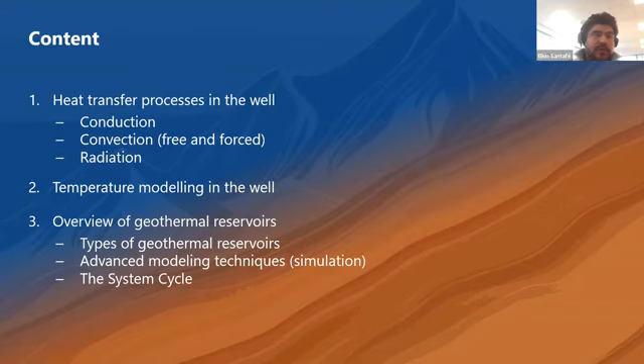So let's start with the agenda for today. We are going to cover three main topics. We are going to review the heat transfer processes in the well by using a general framework and definitions. After that, we are going to cover temperature modeling in the well in terms of the modeling process. And finally, we are going to talk about an overview of geothermal reservoirs, addressing how in practice we usually implement the systems by using, for example, numerical reservoir simulation and taking into account the system cycle.

So let's start with the first topic, the heat transfer process in the well. Heat is a form of energy. Specifically, it is thermal energy that is transmitted from one body to another if they have different temperatures. As a general rule of thermodynamics, heat always flows from the body with the highest temperature to the one with the lowest temperature. This occurs until thermal equilibrium is reached, that is, both substances or objects have the same temperature.

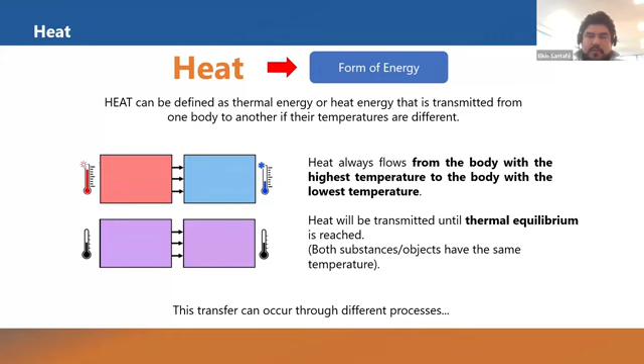This heat transfer can occur through different processes or mechanisms that we are going to review more in depth. These processes are conduction, convection, and radiation. Let's describe in general lines what each of these mechanisms is about. Conduction is the transfer of heat by direct contact between the molecules of a body or substance. The molecules impact each other, as we can see here, and in that way they transfer heat between them. This process can occur in solids, liquids, and gases.

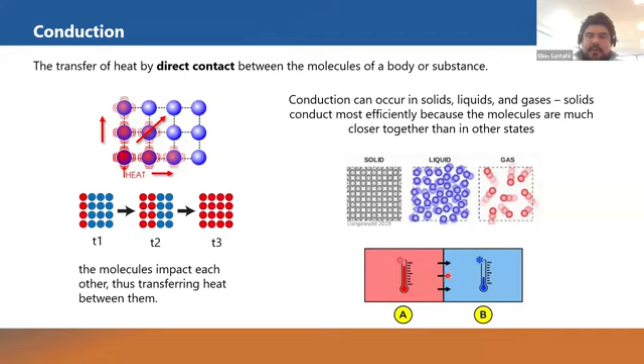The heat can be conducted within the same substance or body, but if we have two individual bodies at different temperatures that are in contact, heat conduction will also occur from the one with the highest temperature to the one with the lowest temperature. The speed at which this heat transfer occurs depends on a property known as thermal conductivity. This thermal conductivity determines the ability of a material or substance to conduct heat. Here in this table, we can see thermal conductivity values for different materials.

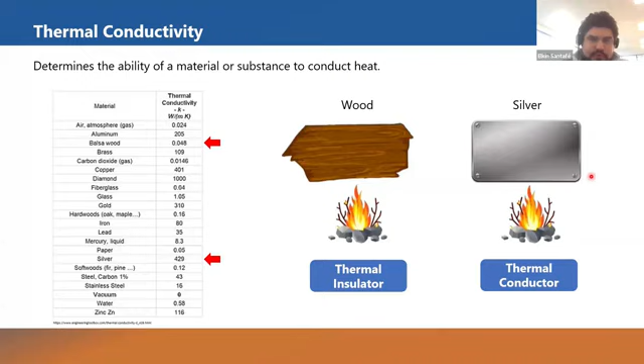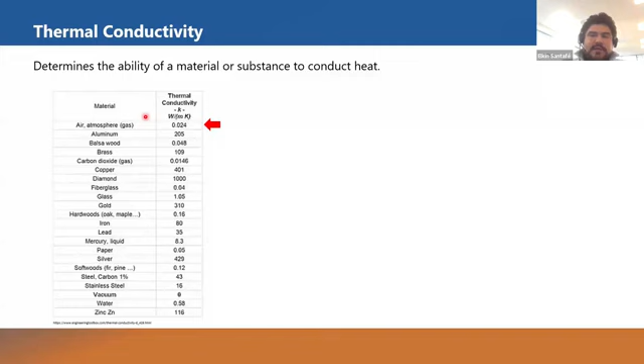In particular, we can see that wood has a relatively low thermal conductivity. On the other hand, silver has a high thermal conductivity. This implies that if we expose the same amount of wood and silver to the same heat source, wood will conduct heat more slowly, so we say it is a thermal insulator, while silver will do so much more quickly, which is why we say it is a good thermal conductor. Continuing with the table, we can see that air also has a low thermal conductivity.

Let's suppose that we have an oven at 200 degrees Celsius. Both the grill and the air inside the oven are at 200 degrees Celsius. However, if we put a hand into the oven without touching the grill, we will feel that the air is hot, but it doesn't burn us, even though it is 200 degrees Celsius. This is because air is a poor conductor of heat, so the heat doesn't pass so easily to our hand, and we do not burn ourselves immediately.

Now, in the same case, if we try to touch the grill, which is at the same 200 degrees Celsius, we will burn ourselves since metal is a good conductor, so the heat will be conducted more quickly. That is the idea behind this example, and it is a typical situation from life showing how thermal conductivity works depending on the situation and material.

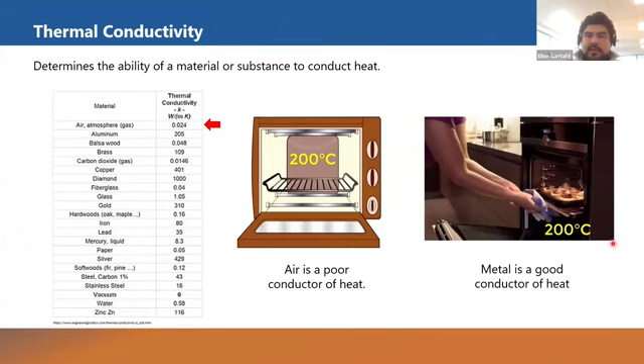What we can say in addition is that it has been experimentally demonstrated that the rate of heat conduction in a plate, for example, this plate, depends on the difference of temperature between each side and the exposed area, but is inversely proportional to the thickness of that same plate.

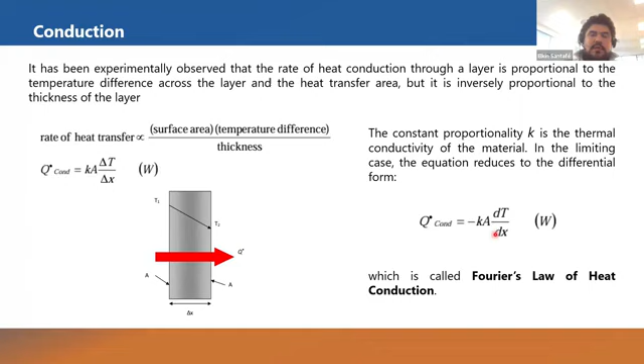So we can express this relationship in terms of deltas, as we can see here, and then take those deltas to the limit to convert them into continuous differentials. In that way, we can write the same expression that we have here in terms of a simple differential equation. And this equation is what we know as Fourier's law.

So moving now to another heat transfer mechanism, we are going to talk about convection. Convection is the transfer of heat by the movement of mass. That is, it occurs in fluids, and this implies that we will only find it in liquids and gases, right? We can divide convection, because it's a complex mechanism, into two mechanisms: natural convection or free convection, and forced convection.

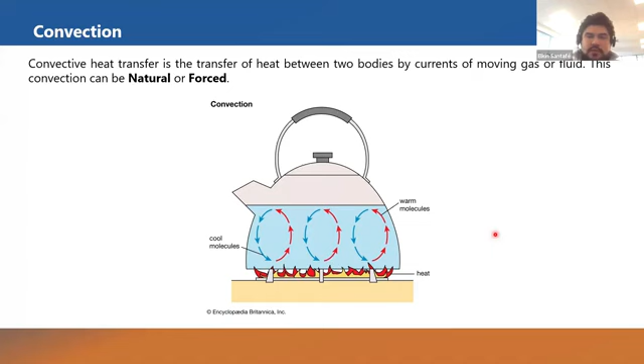Let's talk about free convection first. Free convection or natural convection occurs when the movement of the fluid is caused by density differences, which in turn are products of temperature differences, basically. For example, let's suppose that we heat a container that has a fluid inside. Let's say that we have just air inside.

What will happen here initially is that the heat is transmitted by conduction to the air that is at the bottom. And as we know, a change in temperature in a fluid generates a change in density. So in this case, the air, when heated, becomes less dense, and since it is less dense it tends to rise. So we will have a movement in this direction up, and the cold air basically will go down.

In this situation, to replace the hot air that is rising, the cool air at the top is forced to descend, and we know all of this mechanism as free convection.

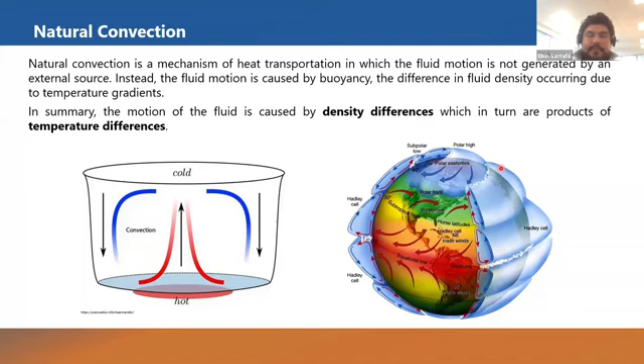Now we have forced convection. Forced convection occurs when the movement of a fluid is caused by external factors other than the local behavior of the fluid. A clear example of this is when we turn on a fan to force the flow of air over a hot surface. In this case, the air that is forced to flow over the hot surface acquires heat through conduction. But by definition, this is called convection, since we are talking about the mass movement that transfers heat from one area to another area.

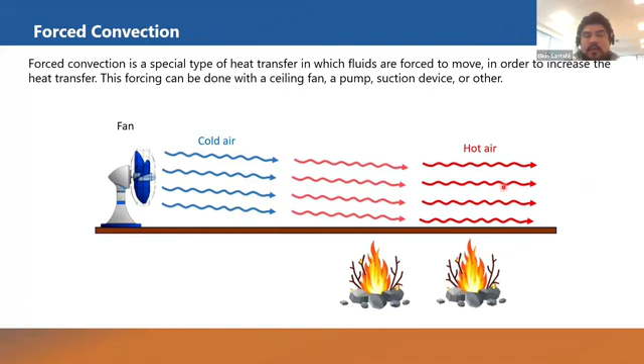So we are moving cool air in this area to air that is now hot on this part of the system. In summary, we can say that convection is a complex mechanism, as I said before. It represents the combination of two ways of transferring heat, and we can give a mathematical image through Newton's law of heating and cooling. That is the mathematical model that describes this phenomenon.

This model is composed of the rate of convection heat transfer, normally expressed in units of watts per square meter. And we say that this variable is proportional to the difference between the initial temperature of the material and the final temperature of the material through a proportionality constant that we are going to call H.

So we are going more in depth about the physical meaning of this H in a further slide. So for now, we manage it like a proportionality constant. We should also mention that the roughness and the shape of the material being heated has an impact in this process. And the value can change by doing the heating or cooling process of an object more quickly. This changes the value of H.

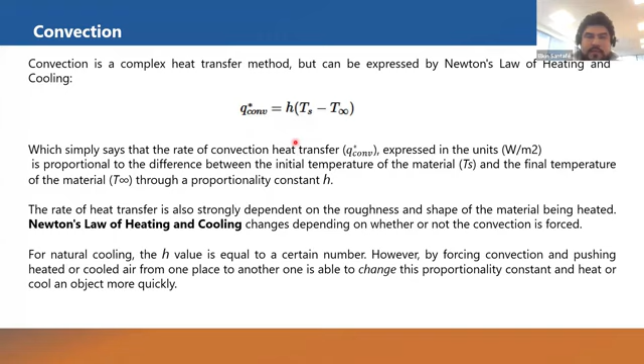So the convection heat transfer coefficient in general varies along the flow direction, right? In terms of the direction in which the fluid is moving. So in many cases, what we do is use an average convection heat transfer coefficient.

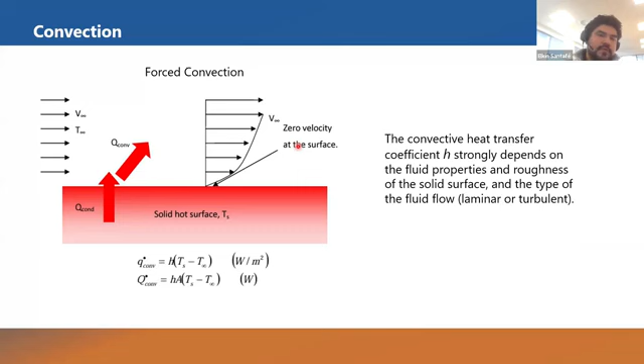Now, let's talk a little bit about the last heat transfer mechanism, radiation. We can define radiation basically as heat that is transmitted by means of electromagnetic waves. That is the concept. Some characteristics of this type of waves are that they do not require a medium to propagate, that they can even move in a vacuum, and also they travel at the speed of light since they only transport energy and not matter.

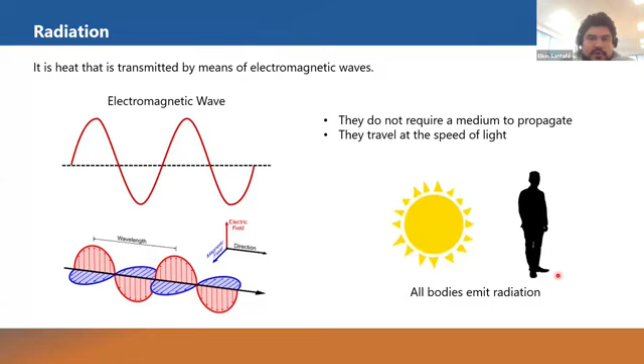But it must also be said that although it may not seem so, all bodies emit radiation, regardless of their temperature, which means that even we as human beings emit electromagnetic radiation too. So let me try to illustrate this idea better. This mechanism generally works like this: the energy carried by this wave is released when the body absorbs these waves.

For example, here we can have a campfire and a person. According to what we were saying, both the campfire and the person emit radiation, right? The difference is that the campfire, being much hotter, emits a greater amount of radiation. If a body absorbs more radiation than it emits, its temperature will increase. In this case, the person is receiving a greater amount of radiation than it is emitting, so the temperature will increase, and that is why the campfire heats the person. That is how this works, and this is a good example to explain how radiation works.

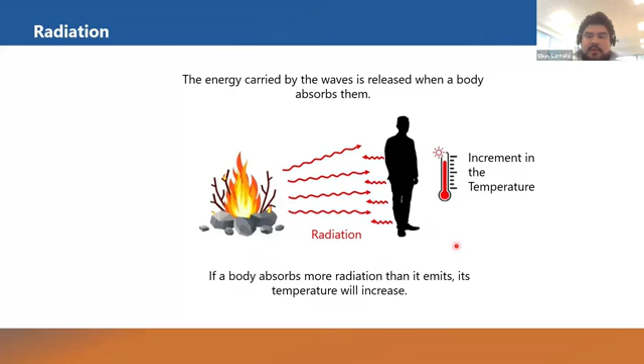So the higher the temperature of the emitting body, the greater the amount of radiation it will emit. That is the idea, since it has been shown that the amount of radiation emitted is proportional to the temperature raised to the fourth power. This is a well-established relationship for this kind of mechanism. What this means is basically that a small increment in the temperature of a body means a significant increment in the amount of radiation that the body emits.

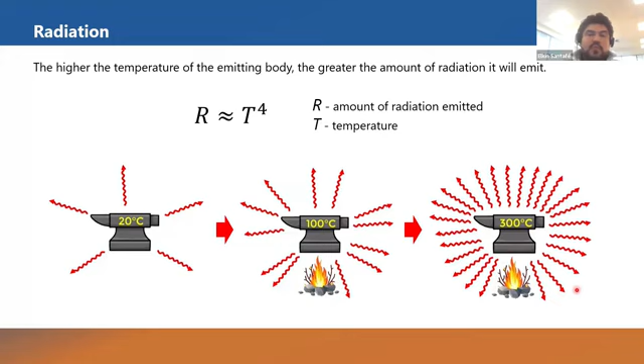For example, an anvil that is at room temperature, let's say 20 degrees Celsius, will emit a certain amount of radiation. However, if we add heat to it and increase its temperature, for example, to 100 degrees, the amount of radiation that this anvil will emit will be greater. And the same situation if we increase the temperature three times more, the amount of radiation will be greater.

Not all radiation is of the same type. That is something that we have to keep in mind, since there is a characteristic of this type of mechanism that is known as wavelength. This is basically the distance between the crests of an electromagnetic wave. And as we can deduce, it is directly related to the frequency of the wave.

What we are saying with this is that if we have a shorter wavelength, we will have a higher frequency, while if we have a longer wavelength, we will have a lower frequency. And all of this is important since the wavelength is also related to the temperature of the object that emits this radiation.

So in other words, the wavelength of the radiation emitted by an object depends on its temperature. There is a relation between these two elements. So the higher the temperature of the body, the shorter the wavelength of the radiation it emits. So this principle is used by current telescopes to observe the stars and the deep space.

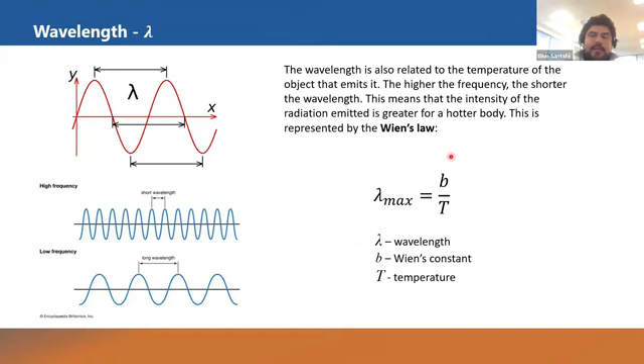And this physics is determined by Wien's law, that is expressed by this relationship here. So if we compare, following the previous example, the sun, which has an average temperature of about 6,000 degrees Kelvin, with air, which has an average temperature of 288 degrees Kelvin, we will see that the sun emits a radiation with a shorter wavelength than the air can emit, basically.

And it must also be said that the amount of energy transported also depends on the wavelength, since the shorter the wavelength, the greater the energy transported, and vice versa. So according to this, the sun emits more energetic radiation than the air can emit, because the sun has a shorter wavelength.

So with this, we can see the difference between the types of radiation, which we can analyze more easily by observing the electromagnetic spectrum, since depending on their wavelength, they can be classified in different groups.

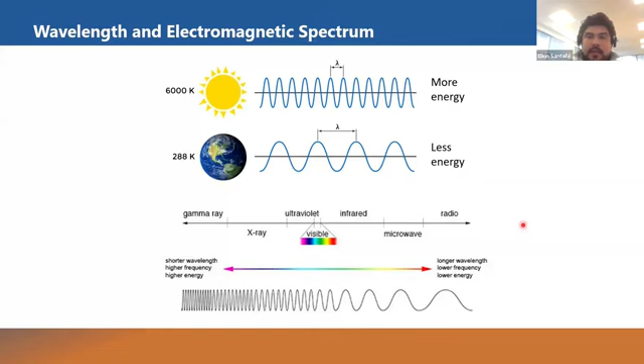We have different groups of waves. There is a dependence on the wavelength, and they are associated with the different types of radiation. But this is the mechanism that we have behind. So let's get down to business.

So all the theoretical framework above applies to geothermal wells too. That is the idea, and that is why I try to establish this baseline of concepts. So if we think about the fact that we are producing or injecting hot fluids, all this heat transfer theory should be applicable to these problems. So what we see here is a rough outline of what a well producing fluids from a reservoir can do.

In a conventional situation, we know that the temperature at which these fluids enter into the well can be low, medium, or high, but certainly that temperature is much higher than the surface temperature. So we also know that there is a temperature gradient associated with the layers of the subsoil, and heat is transferred from the interior of the earth to the crust.

That is, in this scenario, it is clear that there are temperature deltas everywhere, and there is the movement of fluids. Basically the movement of fluids is playing an additional role to the temperature transfer. So this situation in general is indicating that we are going to have heat transfer. So now let's see where the mechanisms that we already covered before apply in the system.

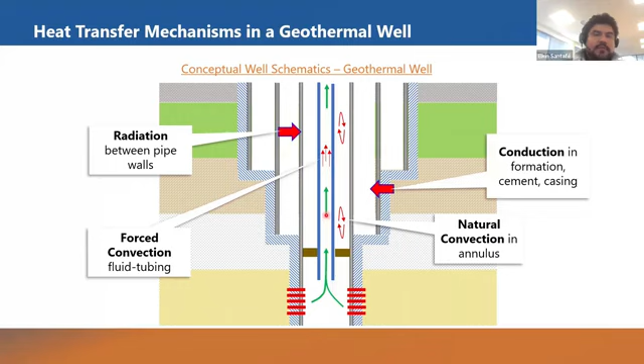This applies not only to production, this can also apply to injection. So in any case, the analysis is applicable because basically this is the thermal model that we are looking for. So now let's see how we are going to model the temperature in the well.

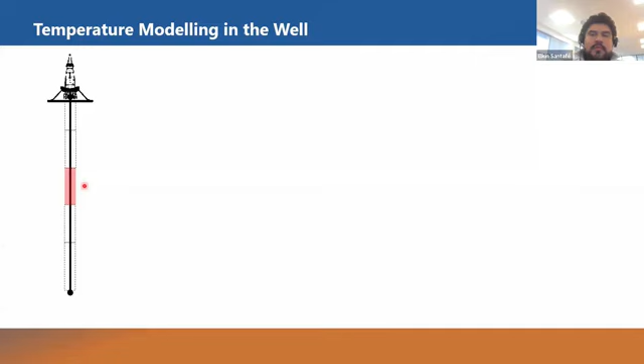So the first thing that we are going to do is take a diagram of a well, and we are going to discretize it into small segments, as we can see here. This is going to help us to perform a localized analysis. Then what we are going to do is extend the analysis that we are doing in a small control volume to the entire section of the well.

Now, in this control volume, we will have a mass flow inlet and outlet, since we are producing a fluid from the reservoir. And in turn, there will be a difference of temperature between this point and this point. So the fluid within this control volume could have an average temperature that comes from an average of the temperature in and temperature out.

And this will contrast with the temperature of the surroundings, or the formation that we have around the well, also generating a delta of temperature in this direction. So this is the direction that we are interested in, because what we want to see is how much heat the fluid that we are transporting could lose or gain through the interaction with the environment that is around it.

So we establish the conservation equation in terms of the energy for this control volume. We will have the heat and the mechanical work equal to the flow rate times the difference between the energy that comes in and comes out of the control volume. This energy that we have here in and out can usually be split into three types of energy.

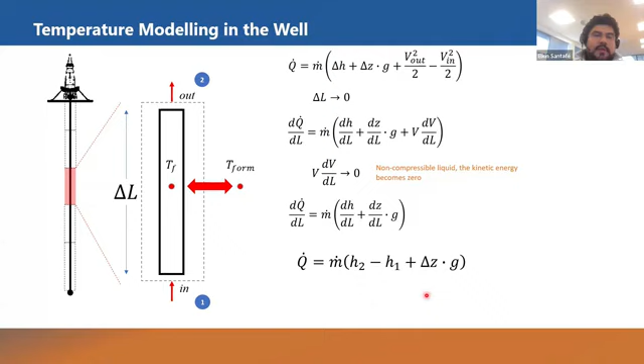The kinetic energy term goes away, basically. This is because the density cancels out, leaving the equation with zero on the right hand side. In that way, this expression is reduced to this. And now we can reaccommodate the terms and expand again, opening the enthalpy term and adding the potential energy term. So now we have this equation, that is exactly the same that we have here.

So let's explain what is happening with the enthalpies. Let's analyze the enthalpy at point 1, that is the inlet. This enthalpy is basically defined by the mixing of all the fluids that can come into the well. This is a general term that can depend on the fraction of gas, oil, and water that we get into the tubing, right? So it's a mixture.

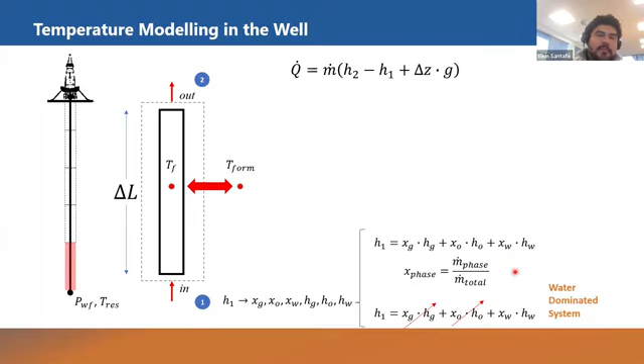So this fraction for each phase is defined by the amount of each phase divided by the total mass that we have in the stream. But if we have a water dominated system, like usually happens in geothermal wells, we can basically remove the terms associated with the gas and the oil, but just if we have a liquid, right? A water dominated system as a liquid.

If we have steam in the stream, we will need to keep this part of the equation. And basically that will represent the steam portion. And we will need to include the concept of steam quality in the model.

So at this point, the balance between knowns and unknowns lets us identify that we have one equation, two unknowns. The enthalpy at point 1 will depend basically on the PWF, that is the pressure at this point of the well, and the temperature at this point, or the temperature of the reservoir.

But in terms of the flow rate, that is this term, the M term that we have here, that will represent the reservoir model. We are going to talk about that term in further topics. And we are going to suppose that we know the distribution of the pressure along the well. That is something that we are not going to solve at this moment.

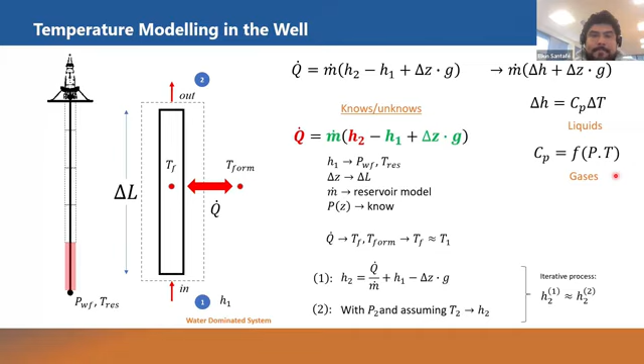Now, let's say that we have a water-dominated system and a liquid phase. So keep in mind all the simplifications that we are developing, because that will condition the model that we are going to get at the end. So now we have an expression here that has just one unknown, that is the heat, this term. We said in the slide before that we can estimate this heat in some way. Let's see how we can do that.

The expression that we can use to estimate the heat that we are transferring between these 2 points is based on 2 terms: U, a geometrical parameter, and a delta of temperatures between these 2 points. But that heat basically is composed of all the mechanisms that we talked about before: a combination of conduction, forced convection, free convection, and radiation.

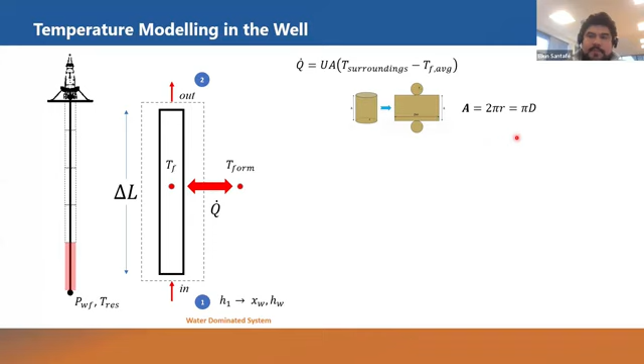So let's try to open the expression a little bit better. The first term that we can break down here is the area. What we have is a simple cylinder that is the physical shape of our control volume, and its dimensions are associated with the dimension of the pipe, basically. However, it is important to remark that we don't just have a single tube here.

If you remember the schematic of a well that I showed you a couple of slides before, it has a lot of components. We have a tubing, we have a casing, the casing is cemented, and this whole arrangement is bound to the rock through cement as well. So actually, the heat will cross all of these components, all of these layers, from the axis to the formation or the rock.

So this will lead us to define between which zones we will have conduction, we will have forced convection, natural convection, or radiation. And in the case of conduction, we will speak of a thermal conductivity, which in many of these cases is more an average conductivity. In the case of forced convection, this coefficient, this convective coefficient, will have a strong dependence

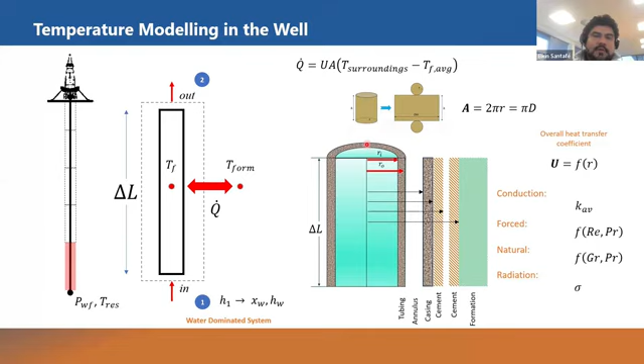So finally, if we consider the radiation, this coefficient will also have a dependence on the Stefan-Boltzmann constant and the emissivity. So all of these dynamics and all of these coefficients will be encapsulated in a unique coefficient that we know as the overall heat transfer coefficient. That also depends on a geometrical parameter that usually is the distance, the radius from the axial point to the zone that we need to analyze.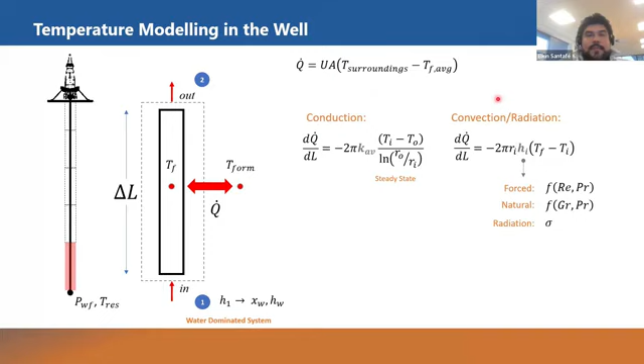So let's go back to this equation. For the purpose of this analysis, we are going to focus on conduction and convection. Thermal conduction and convection are the dominant mechanisms in the case of a liquid filling the annulus. Thermal radiation can be ignored. Radiation is considered to occur only when we have an annulus that is filled with gas or is a vacuum. This is not the case that we are analyzing at this moment. So that is why we are focused just on conduction and convection.

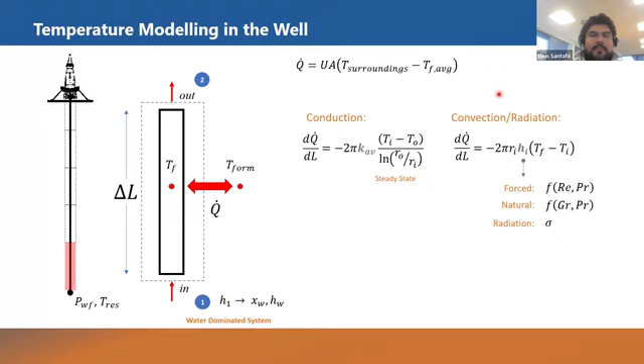So this is the original equation that expresses the energy in terms of the sectional area, the overall heat transfer coefficient, and the delta of temperatures. Here we have the models for conduction and convection. So now what we need to do is to identify clearly each zone in our model. This is an example, and I want to be clear on that. All of this analysis will depend on the final arrangement or completion of the well that we are trying to analyze. But this is an example that illustrates how we are going to estimate this unique overall heat transfer coefficient.

So here we have the temperature of the fluid, the temperature in the inner section of the tubing, outside of the tubing, inside the casing, outside the casing, inside the internal casing between these two layers of cement, outside of the internal casing in this area. And this is the temperature of the wellbore, which for this purpose we're going to assume is a good representative of the temperature of the reservoir.

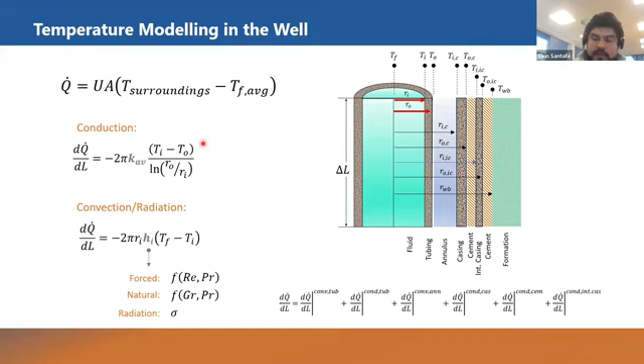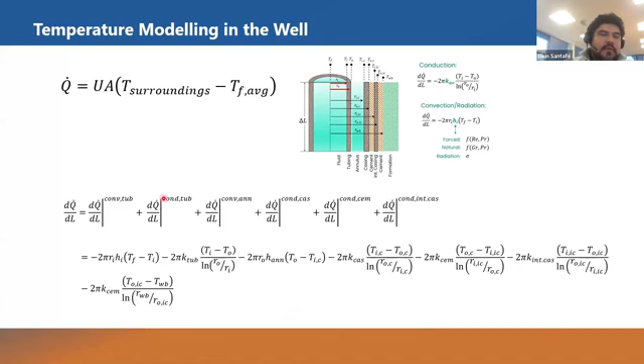So now we add the convection in the annulus, conduction in the casing, conduction in the first layer of cement, conduction in the internal casing, the casing that we have between each layer of cement for this example. And remember that we have a final layer of cement that is contained here. So all of these components add elements into the equation, and that is why the final expression looks like what we are seeing here.

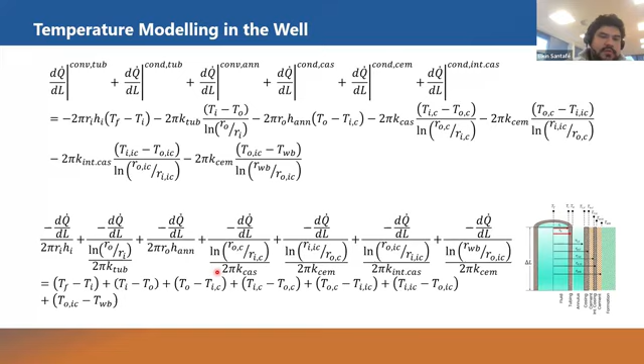With this in mind, what we are going to do is basically rearrange by applying some manipulation of the terms and a little bit of algebra. So now, the only thing that I am doing is to clear the delta of temperature, so we can work better and identify the elements of the main equation. That is what I am trying to pursue with this development.

So here we simply applied a little bit of algebra, as I say, and clearing the temperature, the difference of temperature between the fluid and the wellbore, we get this expression. So this expression already basically has a delta of temperature between the fluid, which will be its average temperature, right? And the wellbore, the average temperature of the fluid and the temperature in the wellbore, basically.

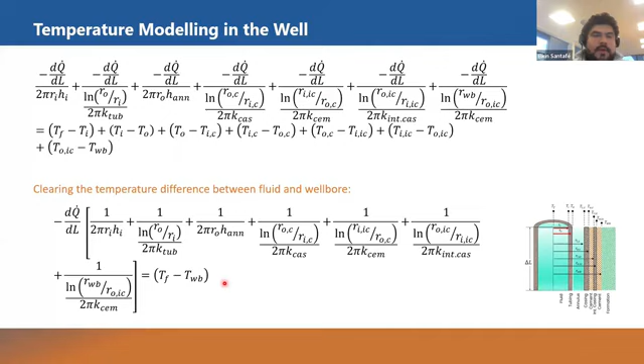We already know, as I say before, that this is not true, but this is the best approach that we can consider in this development so far, just for simplification. So we can assume that this assumption is valid.

Next, now to accommodate the terms a little bit better, we're going to use as a reference value to simplify all the expression the inner radius of the well. So we're talking about this area or this part of the system. So in this case, we will take the internal radius of the tubing, the factor, and factoring the expression. Then we have this expression that we have here, right?

So this expression in red is representing the combining effect of all the coefficients of all the heat transfer mechanisms that are present into the well. So now this expression is, as I say before, just an example about how the well can be configured. But this expression in red is basically the overall heat transfer coefficient, and that can be expressed in watts per meter square per Kelvin, or BTU per feet square hour per Fahrenheit.

So, and as I say before, this is just an example. And what I want to illustrate here is why, in many cases, we need a simplification of all of the system by using a unique simple equation. Just because the system can change and the system can be more complex. And notice, for example, that here we have not represented an insulated coating, which is something that is associated with the completion of a geothermal well.

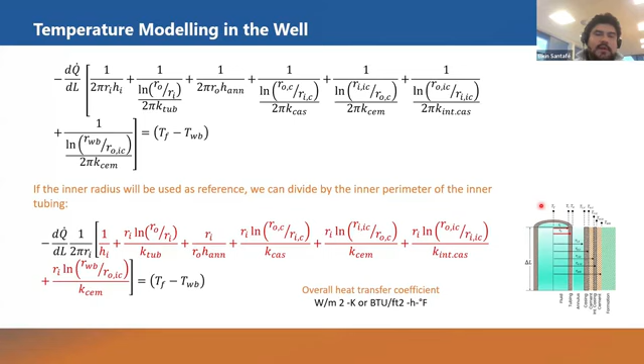However, I think that in this example, with this short mathematical development, we can illustrate the idea about what is behind that variable, called the overall heat transfer coefficient. So now with this in mind, the overall heat transfer coefficient looks like this. And what we can say in terms of the physics related to this variable is that if this coefficient is low, the heat losses are low, basically. But if we have a higher value of this coefficient, the heat loss will be higher too.

So if we understand this, we can go for a general modeling. We can model the temperature profile along the well in a very global value without getting to the calculations related to each mechanism that we have present into the well. Sometimes we don't have too much information related to that, or sometimes we have not decided already what will be the completion scheme that we are going to apply. But in terms of making sensitivities, knowing this approach can be really useful to manage an approximation of the temperature profile in the well.

In addition, what we can see here is that, as you see in the mathematical expression, there is a strong dependence on properties related to the rock, related to the steel, and related to the cement. So we can find databases, thermal properties databases, related to every single situation in particular that compose the system that we want to analyze.

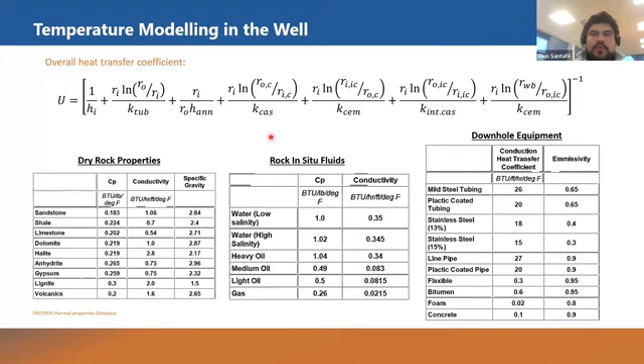So now we are back to our initial analysis. We have two equations, so two ways of expressing the same heat. And now we are going to combine them to generate the mathematical model that describes the temperature of the fluid along the well. So these are the two main mathematical expressions that we have been analyzing so far.

So we express some terms explicitly, right? And we are not going to affect the overall heat transfer coefficient. We are just going to move variables from one side to another side to create the differential equation. And here we have basically the form of the equation that we have to solve.

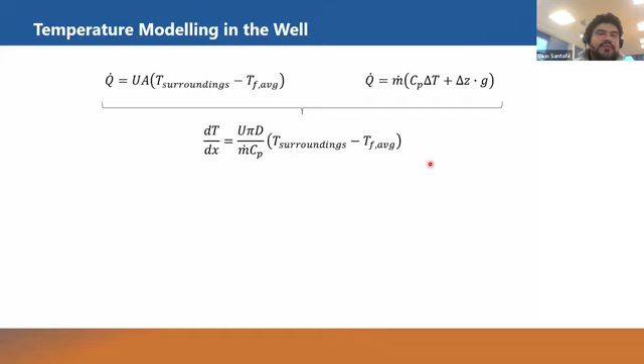To propose a solution for this equation, there are many options that exist so far, but the Ramey equation is one of the most well-known and widely used to offer an analytical solution to this differential equation that we have here.

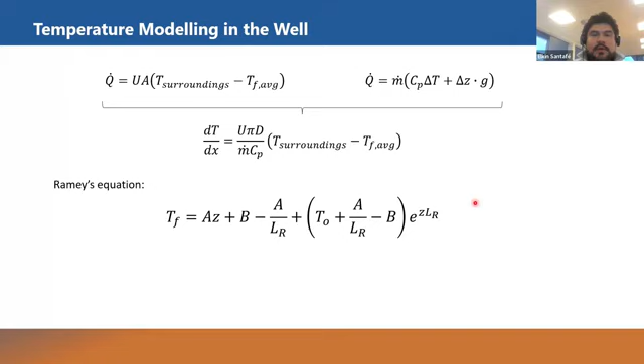We can say, according to the literature and industrial studies, this equation has reported satisfactory results. So this equation is working well in terms of the match fit results. So let's take a look at the meaning of each component in this equation.

The first term that we have here is TF, that is the injection bottomhole temperature. Remember that this development was made around 1962. So Ramey was developing this equation thinking of an injection well, mostly. That is why this term appears explicitly in the solution.

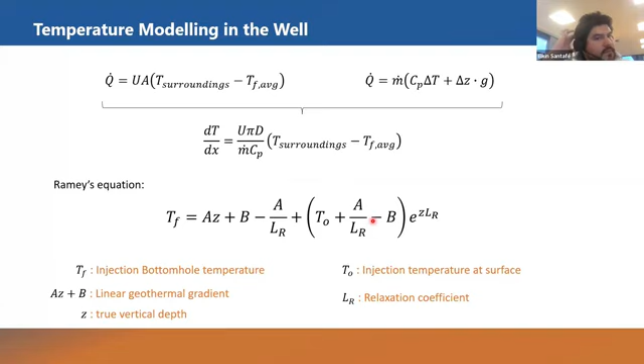This expression, A zeta plus B, is the linear geothermal gradient. This zeta is the true vertical depth. This is an equation that can let you know the temperature at each depth that you need along the well. TO is the injection temperature at surface, and LR is the relaxation coefficient. We are going to see what that coefficient implies.

First, we have to remark that TO, this term here, usually is the unknown in the typical studies that we are doing, because in the normal scenario, what we have is a well that is producing hot fluid that comes from the reservoir. So what we want to know is the temperature at the wellhead. So this is usually the variable that we are pursuing.

In contrast, this temperature here is assumed as the temperature that we can estimate for the reservoir, normally by using calculations that come from a geothermal gradient when we have a really strong lack of information.

Now going deep into the relaxation coefficient, this variable present in these areas of the equation, basically this is primarily a function of the overall heat transfer coefficient. That is why we need to know in which range we can move that value, what can be the value associated to our situation. If we don't know, we can go for the calculation, but you now know the expression behind this value and the amount of information that we need to define to estimate it.

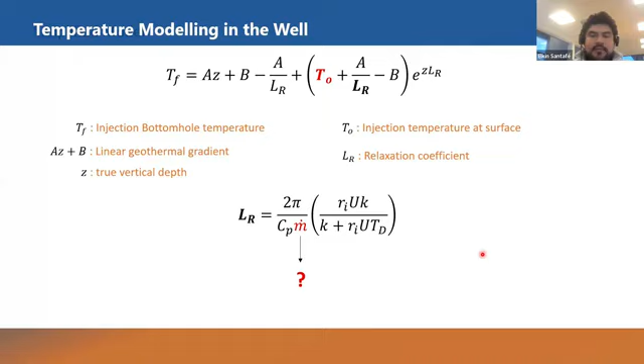Getting into the way we can calculate this can be quite extensive, but I will try to provide a glimpse of how we can approach this value in a general way and how we can estimate the potential of the flow.

So for the reservoir model, we can apply a very general approximation. And this approximation comes from Darcy laws. Basically, with this model, what we are trying to put together is the interaction of the parameters that describe the reservoir. We are talking about porosity, permeability, fluid properties, rock properties, saturation of fluids. In general terms, what we are trying to establish is what can be the range of flow rates that we can get from the reservoir.

So the typical parameters for using this Darcy law are the reservoir pressure, the reservoir temperature, water cut, the total GOR, permeability, thickness, drainage areas, and wellbore radius, right? But again, in some cases, if we don't have enough data for most of these parameters, we need to assume them by using the best estimation possible.

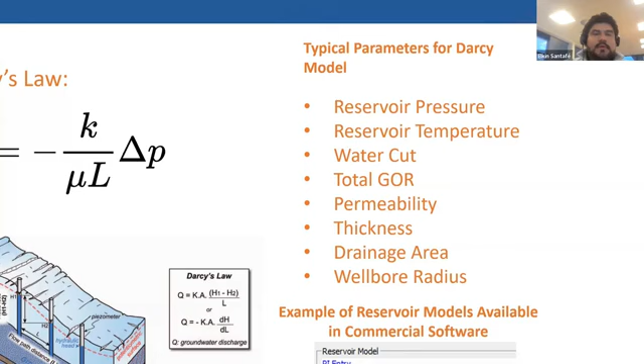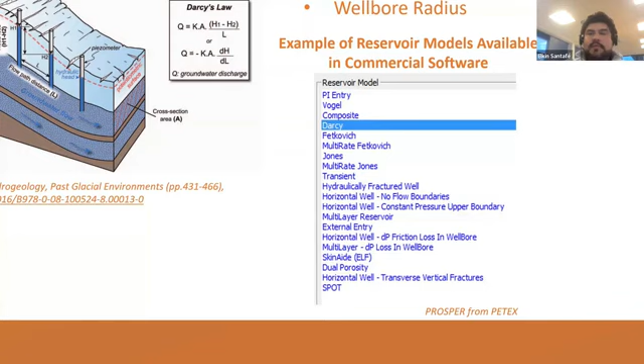So this is an example of how these reservoir models are available in commercial software. And you can see a lot of models. Darcy is just one of the models that we have available to estimate what can be the flow rate that comes from the reservoir. But many of them can imply knowing more or less parameters, or can imply a particular situation in the system, like considering, for example, fractures or the effect of an active aquifer connected to the well.

Here we have a description of what is happening with the fluids when we are talking about the oil and gas system. You can see here the expression of this term, that is the permeability to the oil, the viscosity of the oil, and the volumetric factor of oil, right? But this acts like a correction of the Darcy law, because the Darcy law was developed for water. So in oil and gas systems, we introduced this physical term that lets us describe what is happening once we have a liberation of light hydrocarbons into the fluids, and what is happening with an amount of volume that comes from the reservoir to surface.

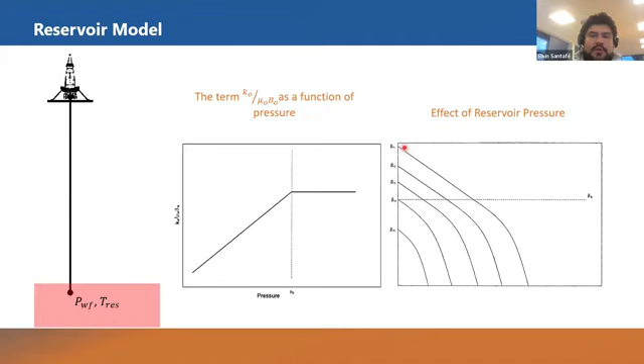So normally, the effect of the reservoir pressure generates a profile in terms of time and flow rates like we can see here, right? There is a kind of arc. But basically, there is a physics behind it. Because under the bubble pressure, we are going to have the effect of that fluid liberation into the reservoir.

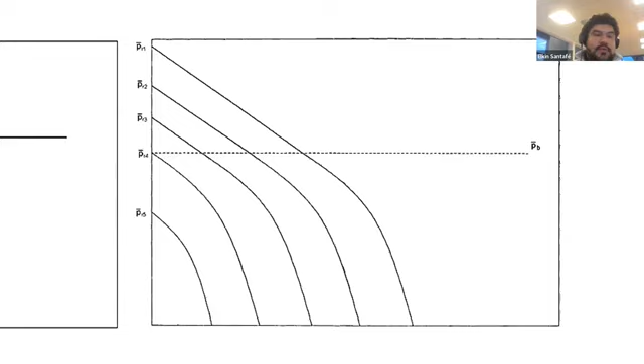To calculate the flow rates, because what we are estimating here along this line is the flow rates, we use the Darcy law, or the Darcy model, when the pressures that we are analyzing are above the bubble pressure. At the bubble pressure, we use the stabilized test data point, a Q and Pwf, to define this critical point, and below this, we use a different model, which is Vogel's equation model.

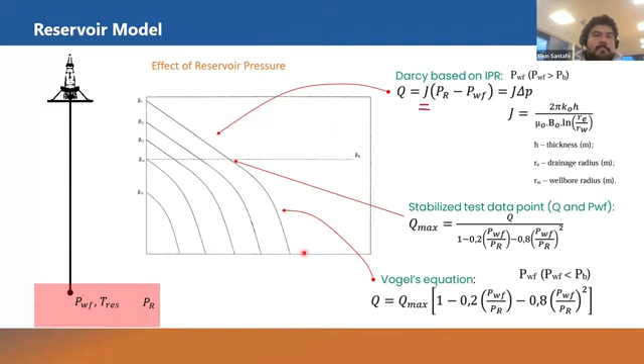But the situation changes when we are not talking about oil and gas systems. For example, following the same approximation, if we talk just about hot water, so if we are quite sure that at this pressure and this temperature what we have in terms of the thermodynamic system is just a liquid, and the same thing at the wellhead, and there is no change of phase along the well while producing the hot water to the top, then the model that we can use is the Darcy model, because we are not going to have this bubble pressure here, and this line can be extended.

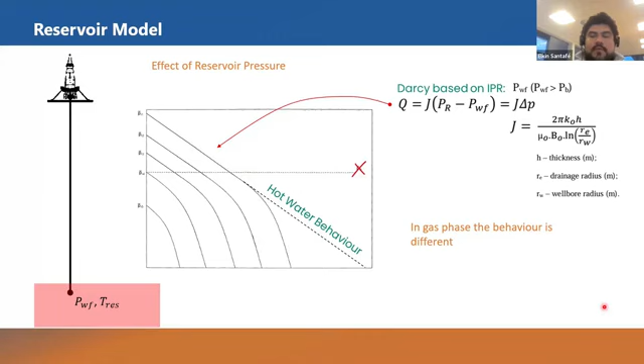In gas phase, the behavior is different, because we are talking about a compressible fluid. That is why we have this trend here, because of the compressibility and the liberation of fluids that we have at reservoir conditions.

So what this situation is telling us is that we need to know what are the properties associated to the reservoir in order to know what can be the potential of that reservoir to produce the fluids that we need. It's not just a matter related to the temperature or how much thermal losses we have along the well. So we need a potential here connected to our system, because basically that is the system that will provide us, along the time, all the fluid that we are going to produce, which will be basically the source of the energy that we are taking at surface.

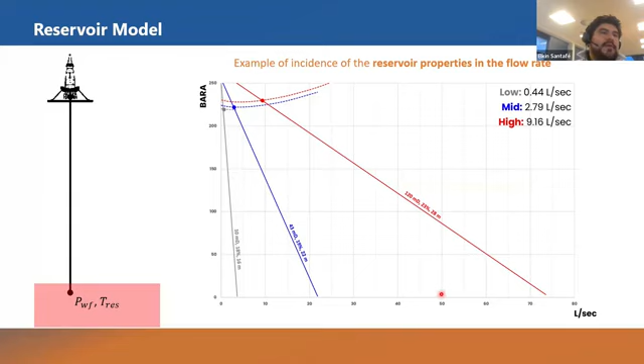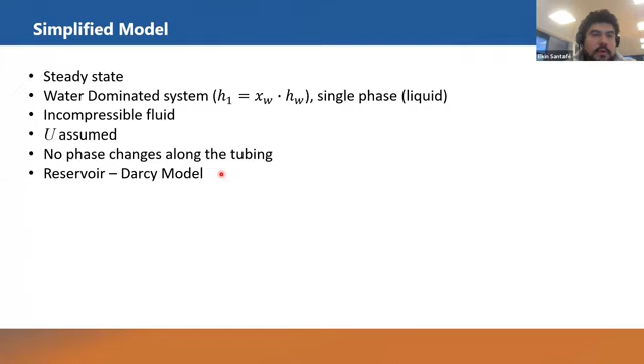This is quite important, because if we have a liquid at the bottom, but we have steam plus liquid at the top, that implies that we will have a phase change along the well, and the model that we present is not covering that situation. And we can cover the reservoir model by using the Darcy model in all this extension. We don't need to go for any model that considers any other fluid dissolved into the fluids that we have in the reservoir.

So finally, to go for an overview of the geothermal reservoirs modeling, what we presented so far is a simplification of how we can work with all of these elements at the well level. And this can work perfectly if we have a situation where there is a lack of information or we don't understand clearly what is happening with the resource. So it's not good to go for the most complicated approach at the first step, because basically what we need to understand is if we have the capability to cover the energy demand that we're trying to cover. And that is why I will present this last part of the presentation.

So in terms of the geologic perspective on the geothermal play system, probably you covered this topic in some session, but what we need to add is that in the definition of the hydrocarbon play systems, they are clearly defined by the source rock, the reservoir, and the trap. But geothermal plays are lacking such a clear set of geological features. Instead, the geothermal play systems appear in diverse geological environments, and theoretically, you have geothermal plays and potential all around the world, everywhere.

So in addition, we can remark that the characteristics of the individual geothermal system are a function of the site-specific variables. So we're talking about the nature and the depth of the heat source, the dominant heat transfer mechanism, as we saw previously, the permeability and porosity distribution, as we saw by applying the reservoir model, fluid rock chemistry, which is a component that is not taken into account in the models that we saw previously, the fluid recharge rate source, and identifying the play type that is the focus of the exploration strategy.

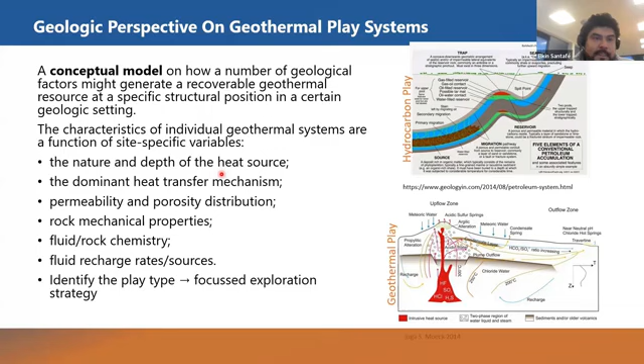So in terms of the type of geothermal reservoirs, we can categorize all of them basically in six groups. So the magmatic reservoirs. Basically, in this kind of geothermal reservoirs, the heated water can be up to 1,000 degrees Celsius and is saturated with corrosive chemicals. That is why we mentioned before that the chemical component is quite important. So the heat from the water can be converted into usable energy because the energy associated is quite high.

As a benefit, we can say that basically the magma geothermal system can provide renewable energy. The water is usually at supercritical conditions, and we can generate, according to the studies, more than 10 times more power than in a conventional source. The problem with this kind of reservoirs is that producing energy from a deep geothermal source, such as in this case a magma, can be challenging. However, there are methods that let you address this challenge. For example, applying advanced thermodynamic techniques to the fluids in order to stabilize the well's walls. That is the most critical problem in this kind of reservoir.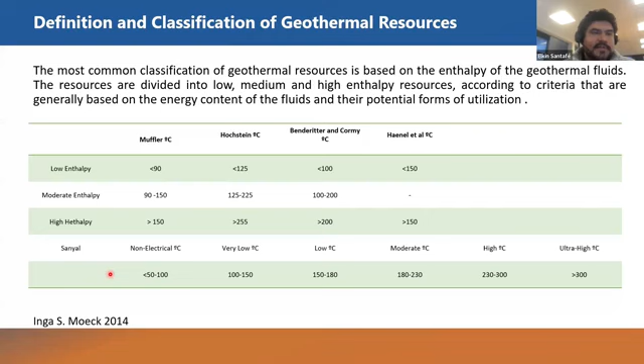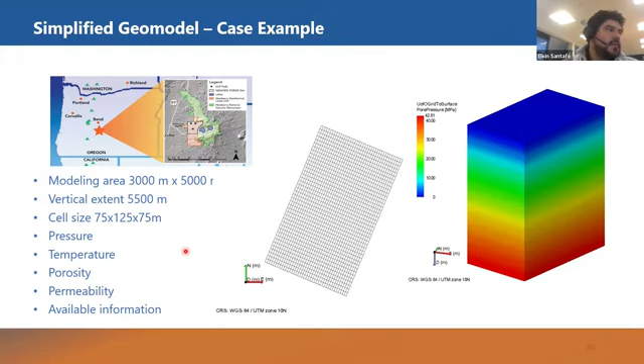And what we can see here is how a simplified geomodel, as an example case, can look. So here, what we are trying to do is basically to model an area of 3,000 meters by 5,000 meters with a vertical extension of 5,500 meters. So we are using 75 cells, 125 cells, and 75 cells. And basically, what we need is to make a model which lets us take into account the pressure, temperature, and include the geological properties like porosity, permeability, and all the information that is available in the region. So we have a supercritical fluid in one zone, and the other zone is not in that condition.

And basically here we can see the temperature profile that we got from the simulations. So the initial condition basically is determining the coexistence of superheated water and supercritical water in this kind of model. And what we are getting as an outcome of this model is the thermal power output.

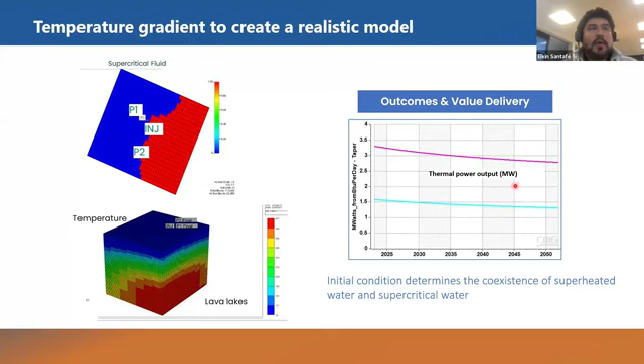This is quite important because in terms of the system cycle, what we have is a connection between a reservoir and the production wells with the surface system that basically is composed by the geothermal plant and finally the grid connection. So what we covered today in a general way was, okay, what is happening with the geothermal reservoir and what is happening with the production wells with a simplified model.

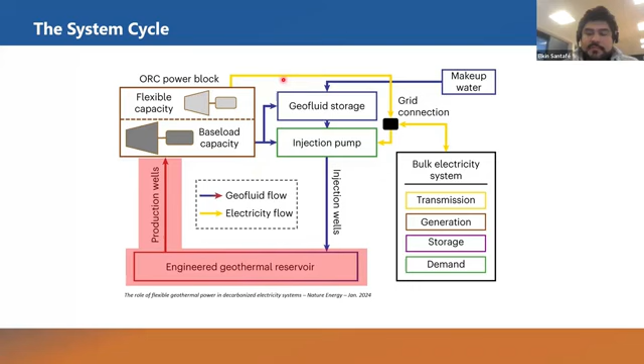Yeah, but this model or this part of the system is connected to the geothermal plant, and that plant is providing basically inputs to other parts of the system that are linked to it. So in this diagram, you can see how usually this looks like. So we're talking here that we have the reservoir, we have our analysis here, and after applying our model, we can estimate what can be the temperature of the well top, right?

And with this temperature, we can establish what is the amount of energy that we can get from the fluid at this point. This is not the total energy that we have available. If we can get some percentage of that energy, we need to get that energy by creating a drop of temperature. And this temperature that we have here, we will define as the temperature of return to the reservoir. So this delta T is creating basically an amount of energy, but that amount of energy is considered by a thermal power output, right? That is the amount of energy that we are going to put into the geothermal plant.

But again, this amount of energy is not the final total energy that we are going to use in terms of the electricity system, because this energy that we have here is affected by the efficiency of the plant. So look how much energy we can lose in the process. So it's not just a thing to evaluate this part of the system.

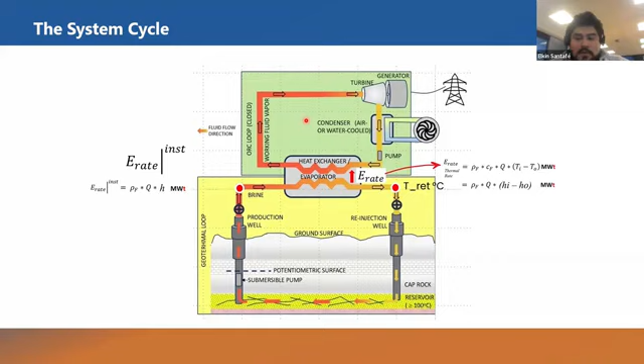So with these ideas, I conclude the presentation for today. I don't know if Yamal has any other idea to add in terms of the geothermal systems and the way in which we are usually applying simulation or reservoir simulation to these systems.

Elkin, thank you for your presentation. I think the idea that we want to present here has been well covered by you. And if not, nothing to add from my side. Appreciate it. Thank you. Thank you very much, Yamal.

Thank you very much, Elkin, for such a detailed presentation, going through the whole process of the heat transfer types and walking into the equations and what that would mean when you're looking at the wellbore and the reservoir itself. I do want to mention that there was a question in the chat box from Thomas that said, considering a flow rate of 60 to 80 liters per second, which is about 38,000 barrels per day, does conduction, convection, or radiation play any reasonable role compared with reservoir heat?

Well, let me see. So the question is looking for what kind of system we are looking for, because basically what we can say at this point is, okay, if we are considering a rate between 60 and 80 liters per second, what we have is a range of rates that usually are in the range of viable flow rates to get a good value of wellhead temperature.